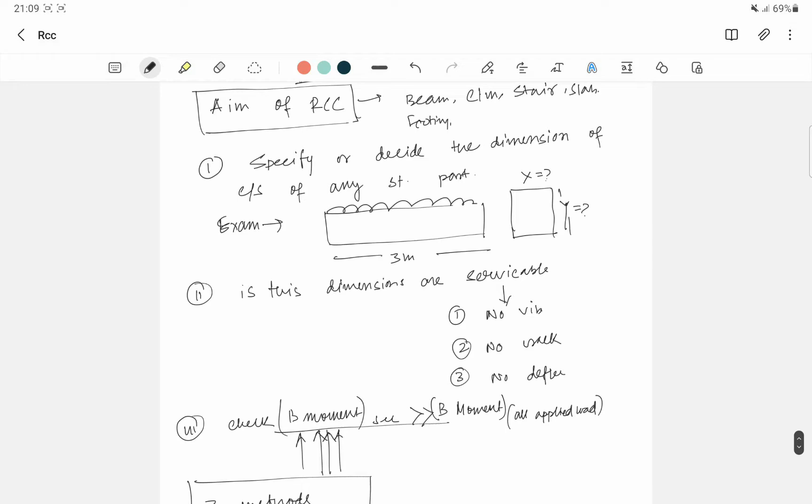In my last video, I shared what is the aim of RCC. In case you missed this video, there is an I button, or you can go to the playlist section and watch my last video.

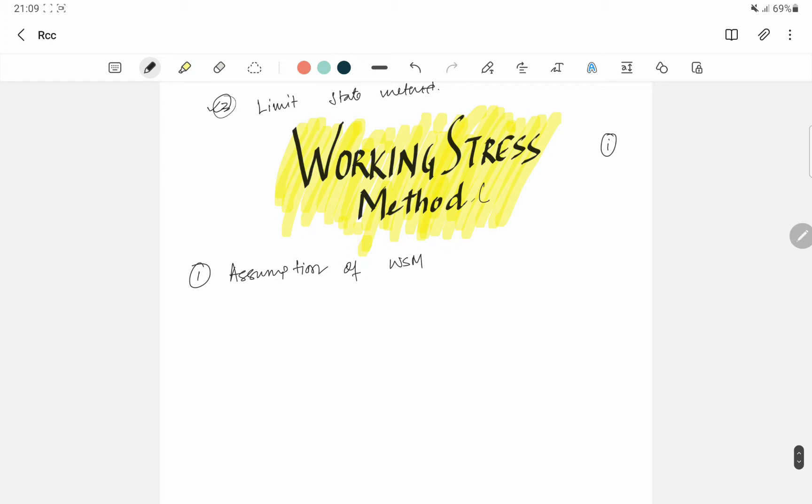Today, from this video, we'll learn the assumptions of working stress method, which is abbreviated as WSM. And number two, what are the disadvantages? These two things we discuss in this video.

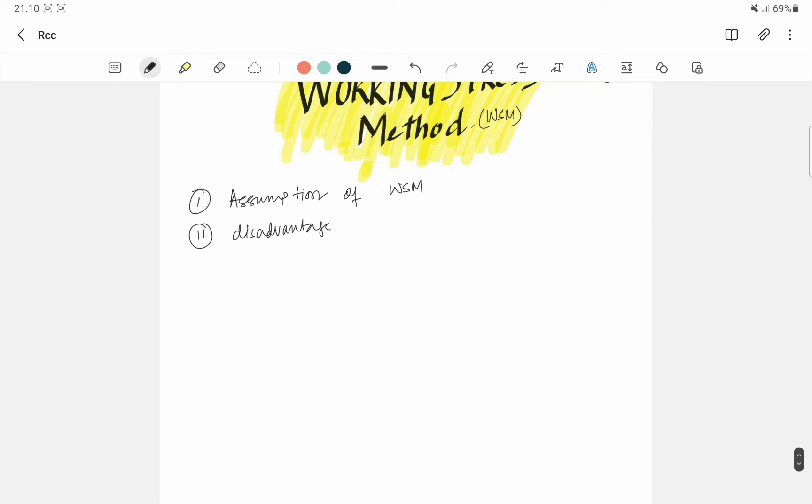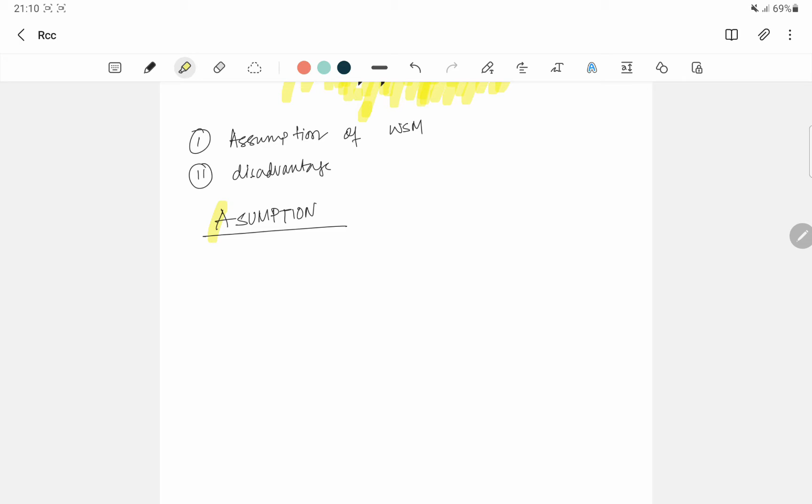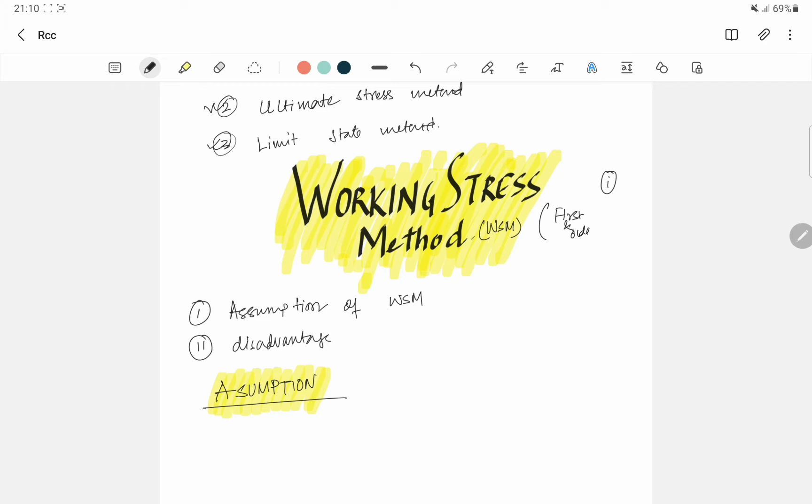First, we talk about our assumptions. Before starting the assumptions, one thing I want to share with you: WSM is the first and oldest method. From here, the design started.

Assumption number one: plane section before bending will remain plane after bending.

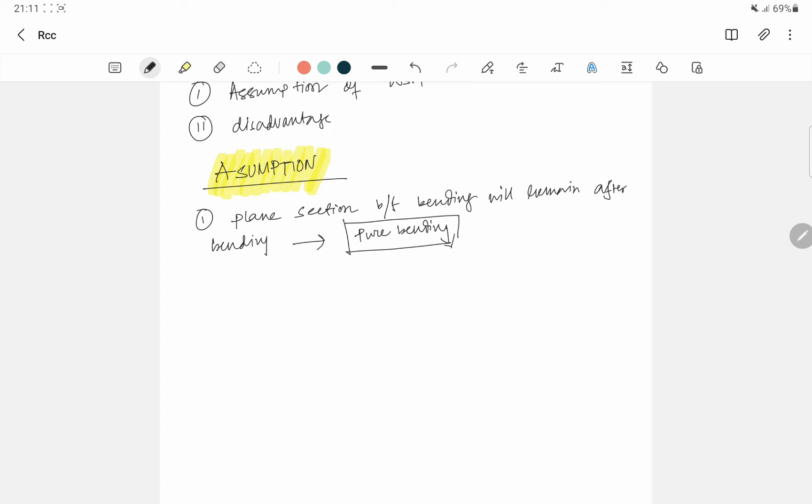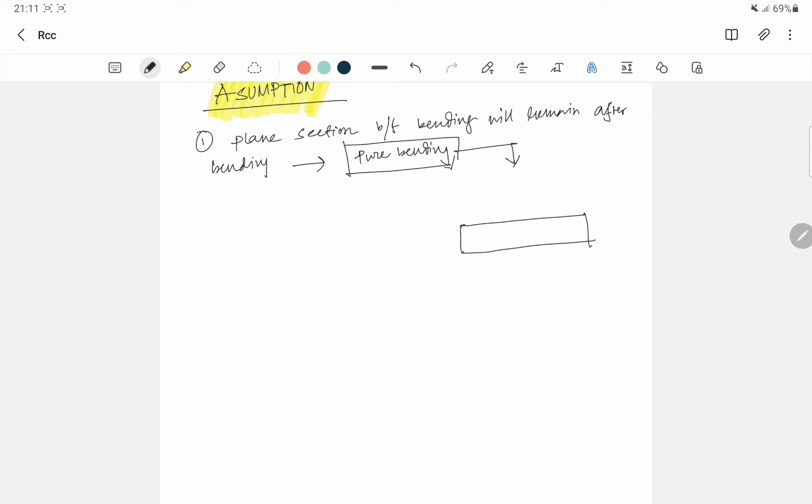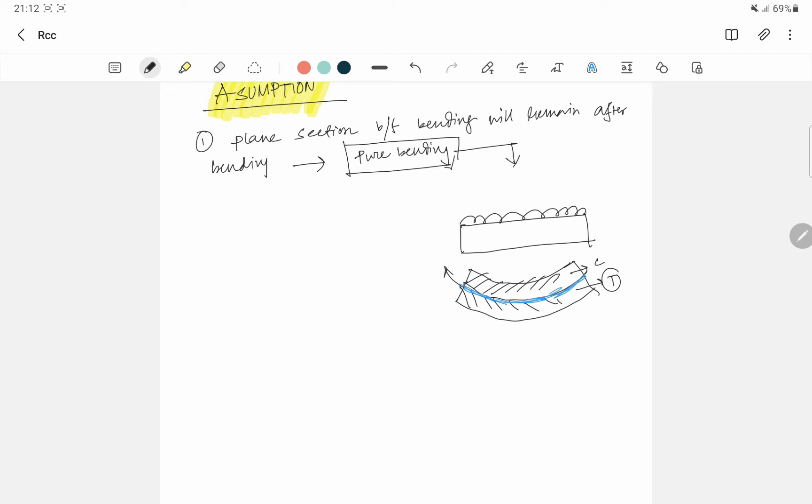These whole assumptions come from the pure bending chapter from Strength of Material (SOM). From the pure bending chapter, we find this diagram where load is applied in this way, then the deflection pattern will be this. So here compression will be generated, here tension will be generated, and this is our mid-section. This mid-section is neutral.

Why neutral? That means here is no compression, no tension. That is why they are saying plane section before bending will remain plane after bending. Understanding this statement, we can say these whole assumptions obey the elastic theory. Why elastic theory? Because the first statement is from pure bending, and pure bending is also from elastic theory.

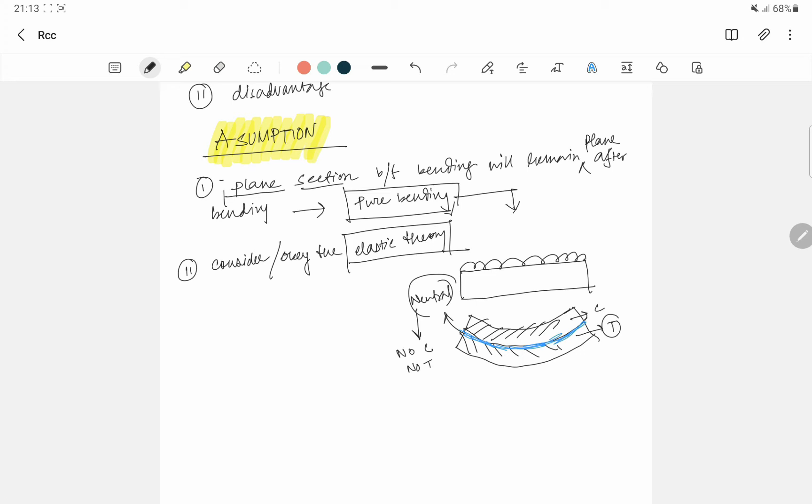So this definitely obeys the elastic theory. Number three, as both are obeying the elastic theory, then the bond between concrete and steel is perfect.

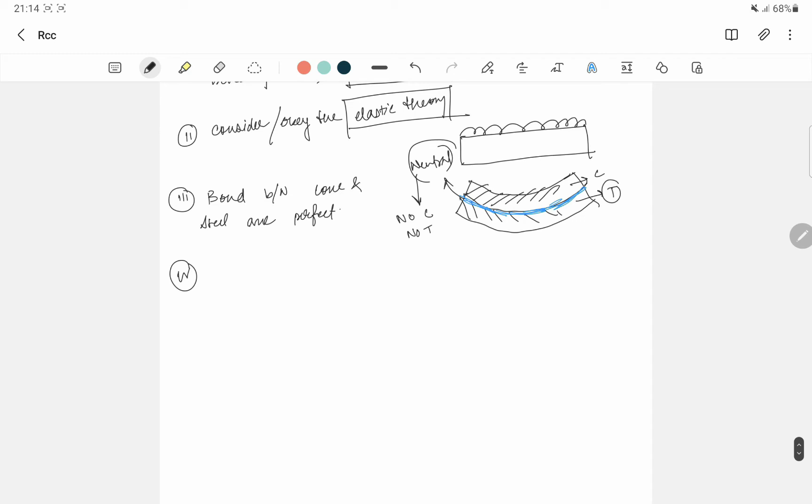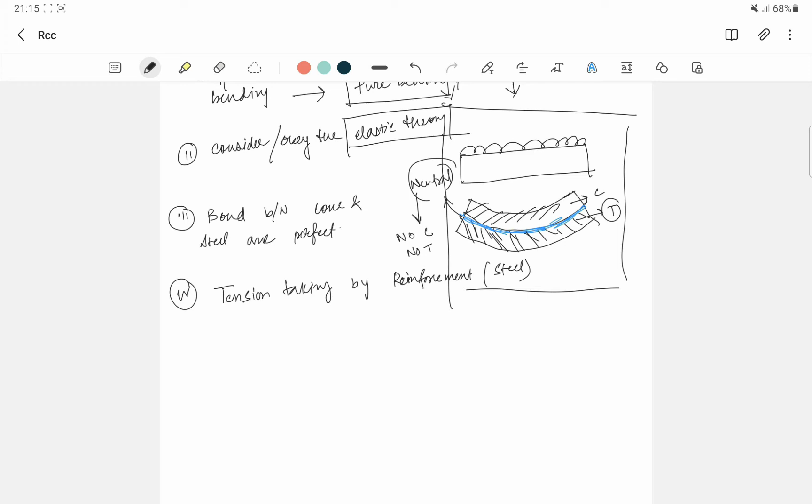Number four: tension is acting or generated here, so the tension force or moment is taken by the reinforcement, as steel. We are talking about WSM, but the first line itself says everything - plane section before bending will remain plane after bending. This comes from pure bending, which has this diagram, and from this diagram every assumption comes. That is why I am saying always go with the concept, always go with the fundamental, because everything comes from your fundamental knowledge.

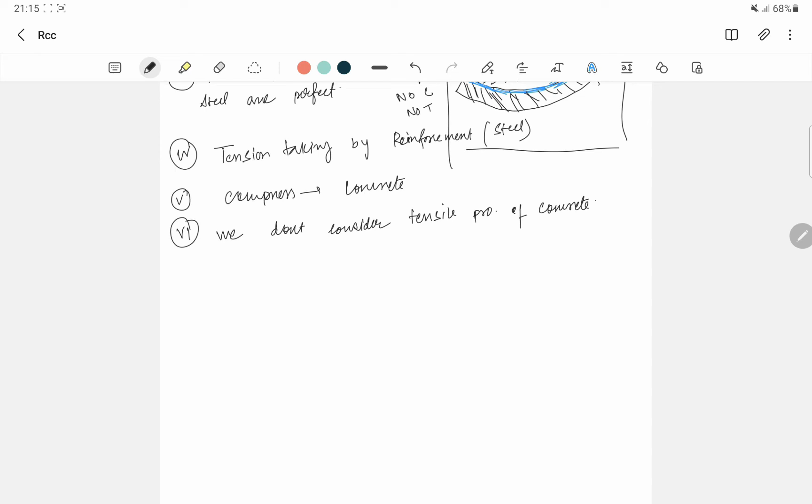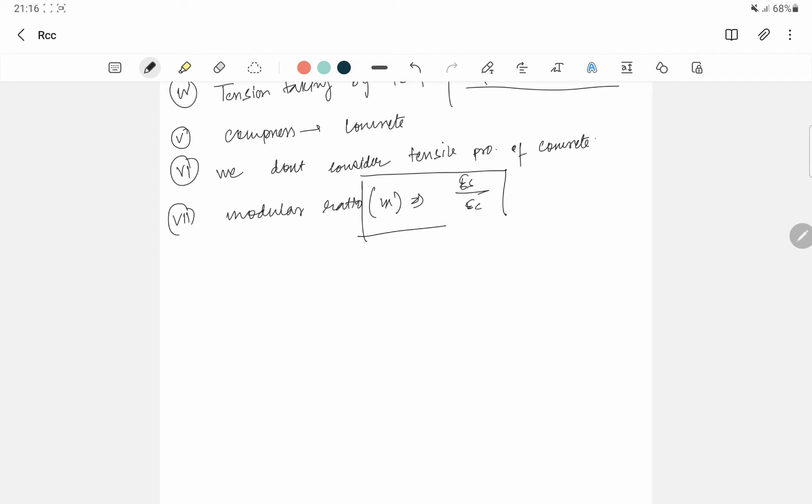Then in WSM there is a modular ratio, denoted by M. When we start our designs, then we'll talk about this modular ratio, but here just know that modular ratio is the elasticity of steel by elasticity of concrete. That is your modular ratio.

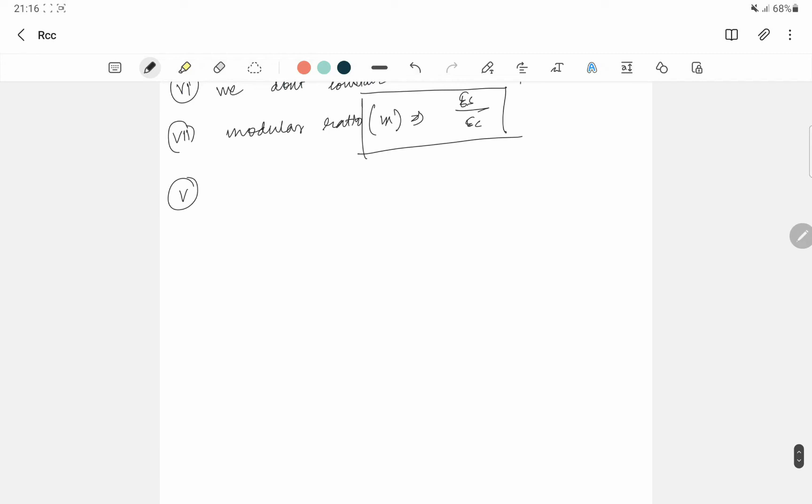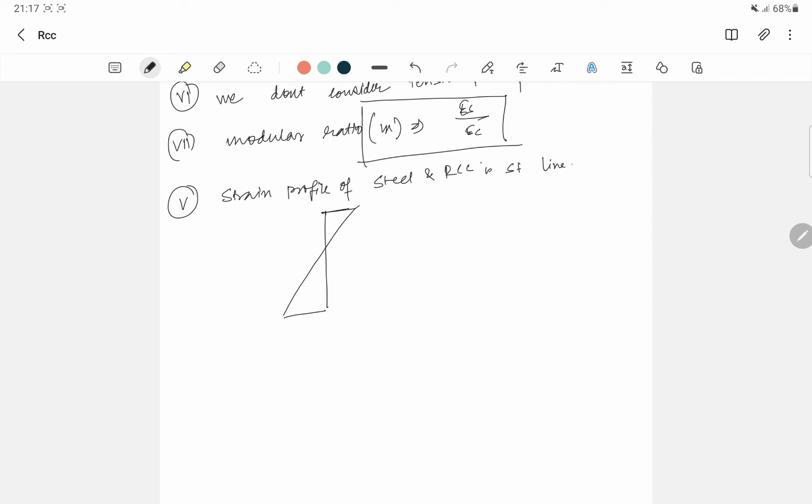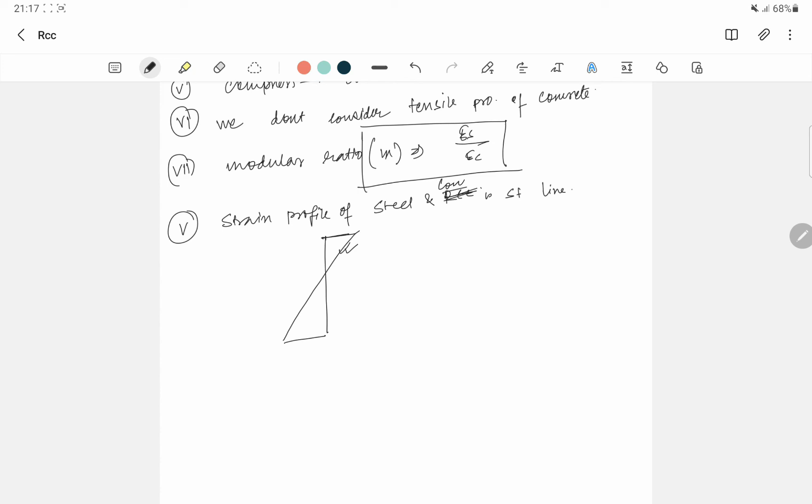And as we are saying that it obeys elastic theory, then we can say the strain profile of steel and concrete is a straight line. That is why we have to draw this strain profile. Now those who are reading RCC for the second or third time, just think about that - always you draw this figure. But why? Because in the WSM assumption we are saying that the strain profile of steel and concrete is a straight line. That is why this is our strain profile.

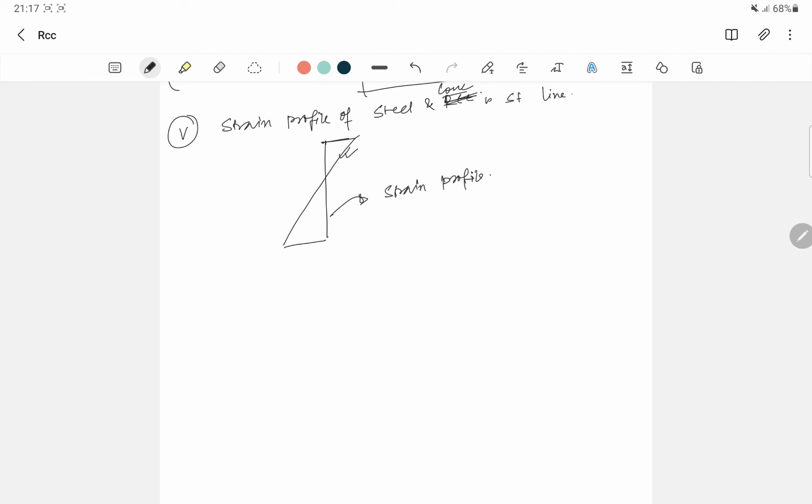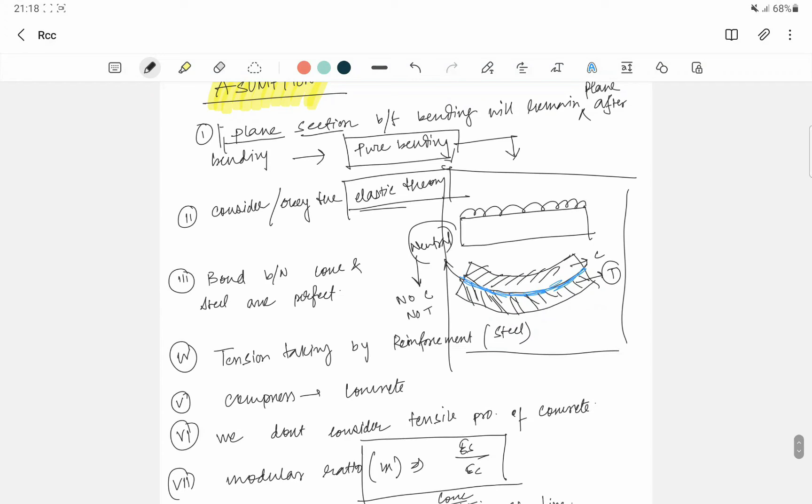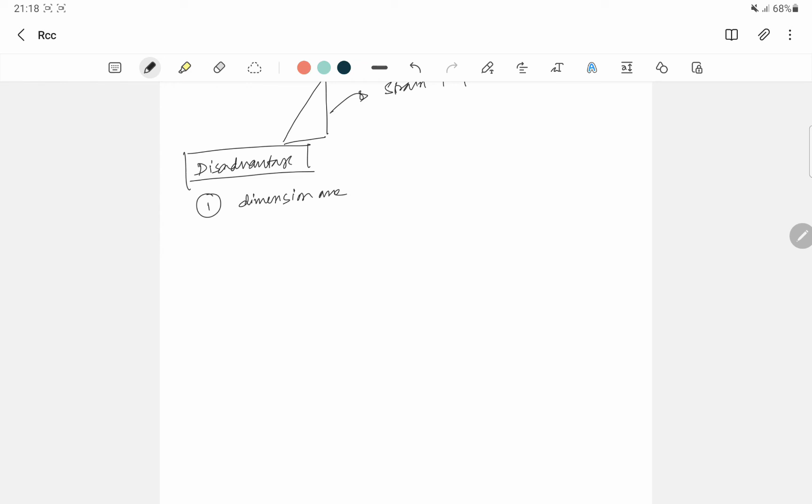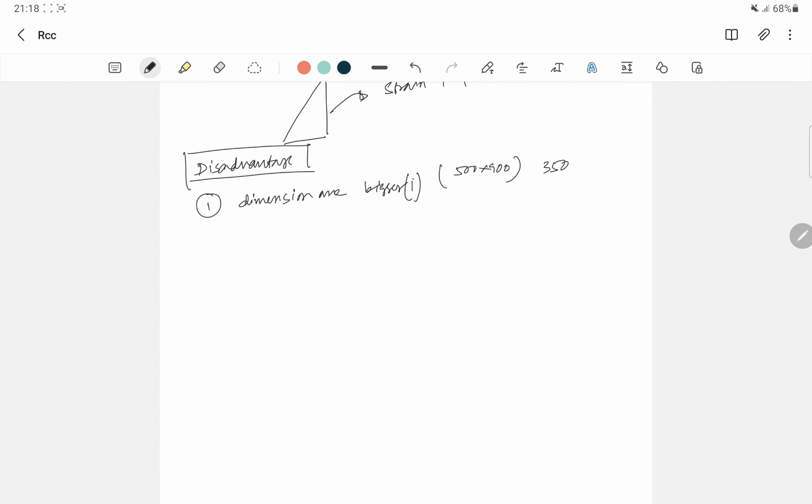So these are the assumptions of working stress method. We were working with these, but after working for lots of years, gradually we found some disadvantages. First disadvantage: dimensions are very much bigger. Like suppose a beam's cross section comes out as 500 by 900 - these are two dimensions of a beam. A slab's depth comes out as 350 and above. So this is the major issue number one, the bigger dimension issue.

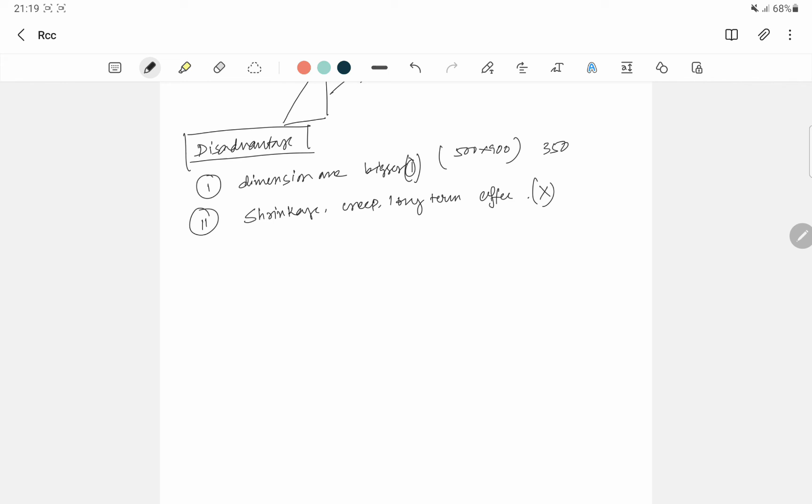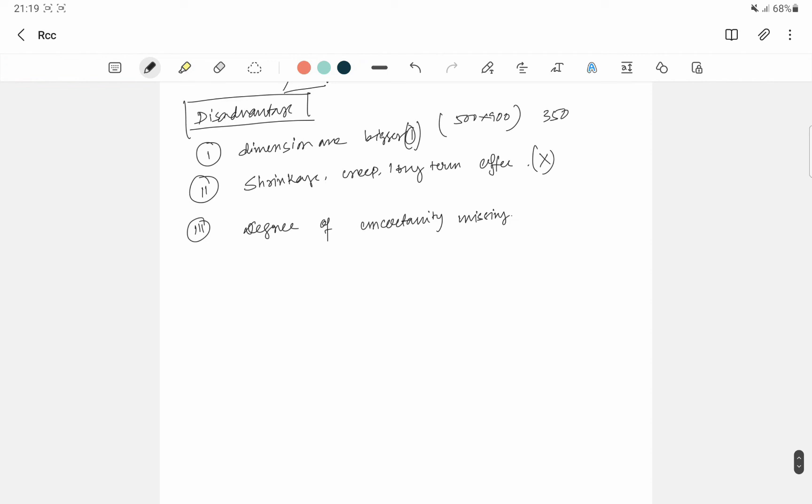Number two, when starting the design in practical scenarios, there are issues like shrinkage and creep, meaning gradual loading, long term effects. So these are all not considered in the working stress method. Number three, degree of uncertainty is missing, because in the WSM method we are just considering the factor of safety of steel and concrete.

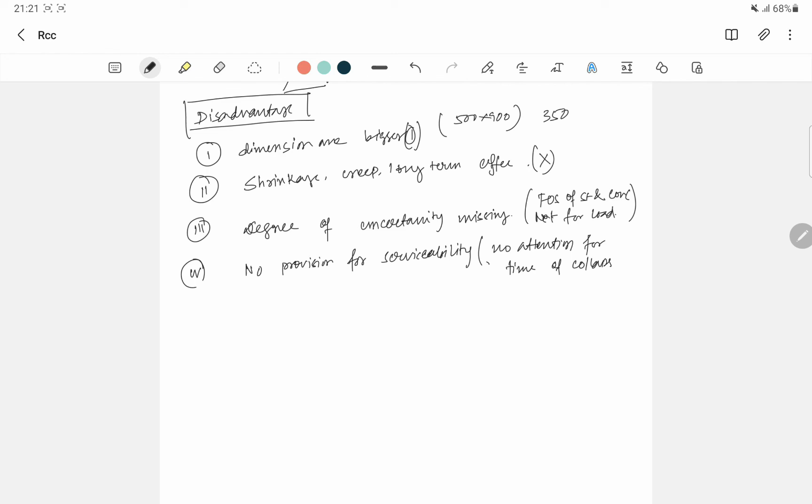Not provision for loading condition. Number four, there is no provision for serviceability. That means no attention for time of collapse - no attention, no warning, you can say it.

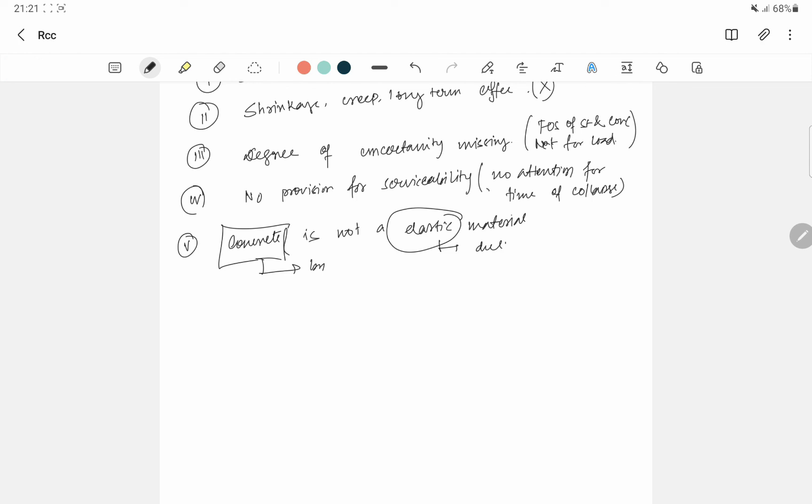Number five, we are saying that they obey elastic theory, but I am saying concrete is not an elastic material, because elastic material has some ductile property whereas concrete has brittle failure. So these are a few disadvantages.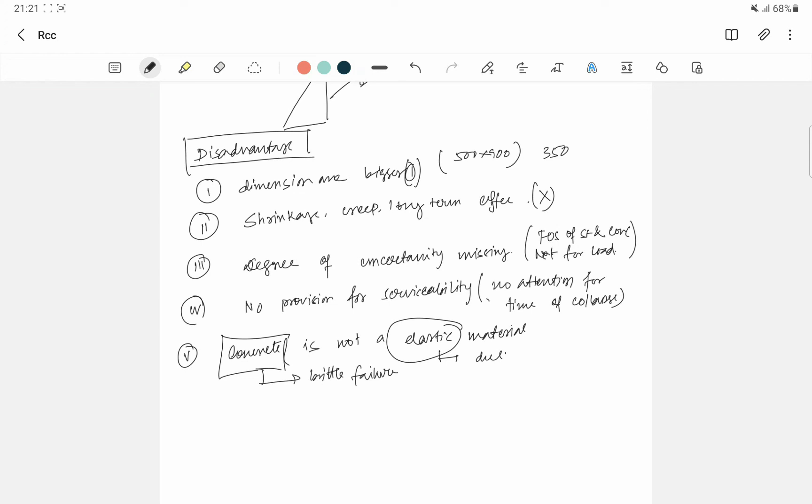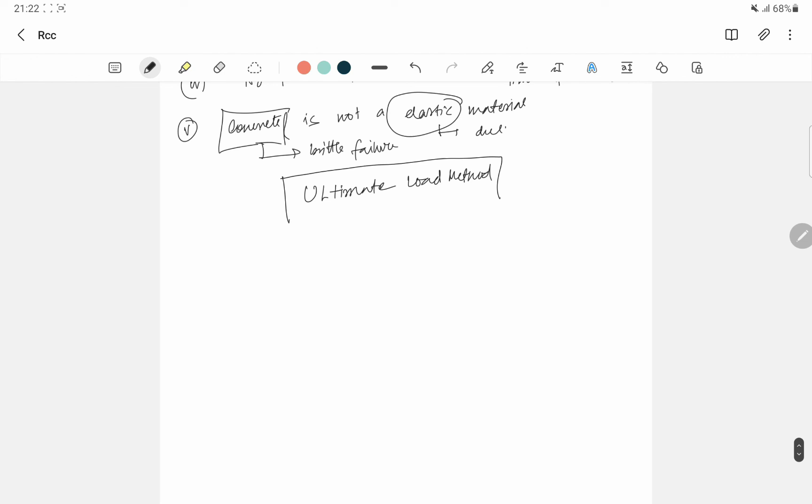That is why we are thinking in the back of our mind that we need some new method, and then we finally come to the ultimate load method. Ultimate load method, ultimate stress method, both are the same. So this is all about the working stress method, where I discussed the assumptions and disadvantages.